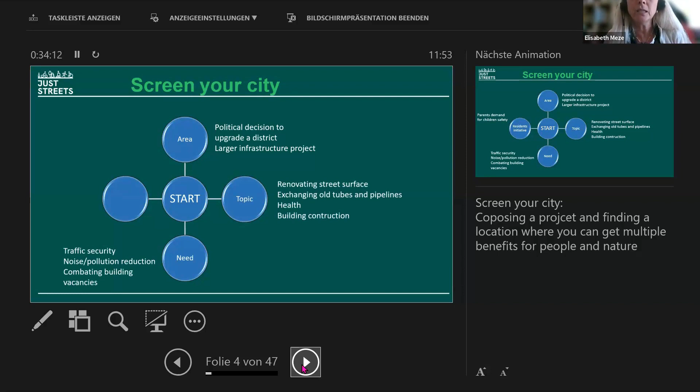So where to start? As a suggestion, try to screen your city. Where are areas where the politicians already decided to upgrade a district for a larger infrastructure project? Or are there topics like exchanging old tubes in the streets where you have to remove asphalt anyway, where to renovate a surface, where there are big building constructions, or where there is a need of more traffic security, reduction of noise and pollution, or reducing the amount of empty shops in a neighborhood, like combating building vacancies? Or are there initiatives in a city where residents want more children safety, more traffic security? Try to screen your city and find a place where many of these elements fit into.

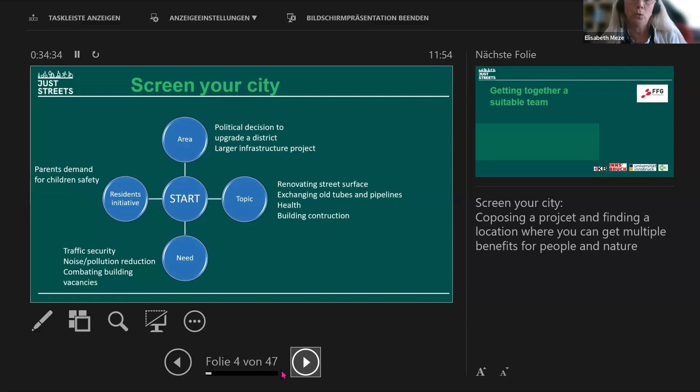As a second step, try to get together a suitable team, because you need to back and engage each other and strengthen each other to perform a big change in creating a climate fit public space. So where we started was a collaboration between the municipality's utility company dealing with water, sewage, garbage, etc., and with the university.

And in the city, as I was involved, I thought, who of the other departments can I involve to strengthen each other and maybe have some better collaboration where we can join different projects together? So I found team members in the Department for Green Space and the Department of Engineering.

And then at the same time where we started, Innsbruck finally got a climate map identifying areas which are hotspots, really hot spots during summer months because of dense building and a lot of asphalt saving heat in the surface. We sent out a PhD student to detect really hot spots which are useful, where we could start implementing blue infrastructure.

And at the end, we found something. It is not a park, it was actually a traffic island where 5 streets joined together. It was not the hottest place in the city, but with very much sealed surfaces, as it was adjacent to the municipal's fair or exhibition center. There were already street works in the pipeline, so they planned to make a meeting zone, and they were building at the back, here you can see it, a new train station. So we thought maybe that's a useful place where we could implement blue infrastructure for cooling the city.

This area had also traffic problems. They were planning 120 new flats for social housing, a very unattractive street place.

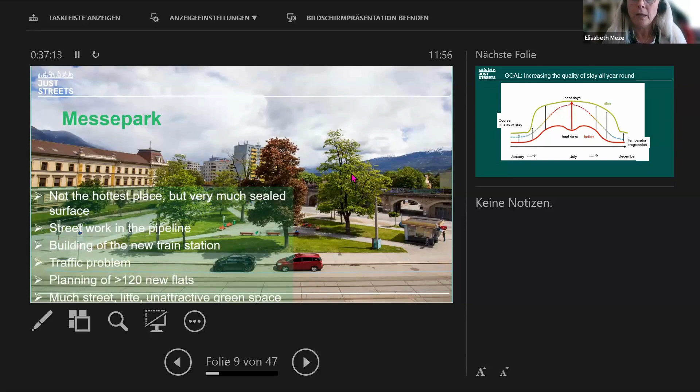So, how do you go ahead? When you look at the dotted line, you see a normal temperature curve throughout the year. In the park, the quality of stay, shown on the red line, means people don't use such a traffic island in the winter time. Maybe they sit down in the spring. In the summer, when it's too hot, they retreat into their homes again. And in the autumn, they come out, and in the winter, they don't enter the park again.

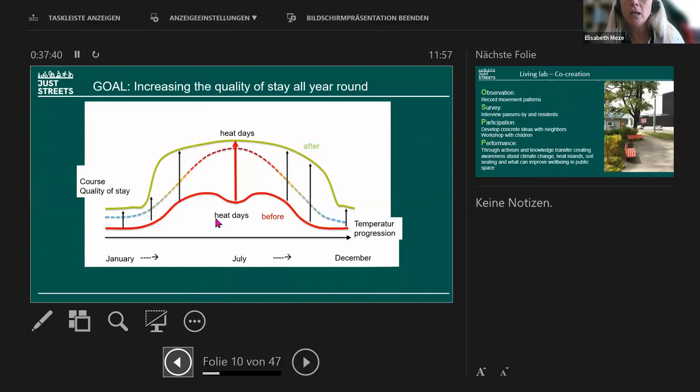What we wanted is to lift this area to a higher level with a higher quality use during all the year, meaning also in the winter it should offer quality of stay to residents. And in the summer, which is more important, during the hottest times of the day, people should use it as a place to get relief from overheated temperature.

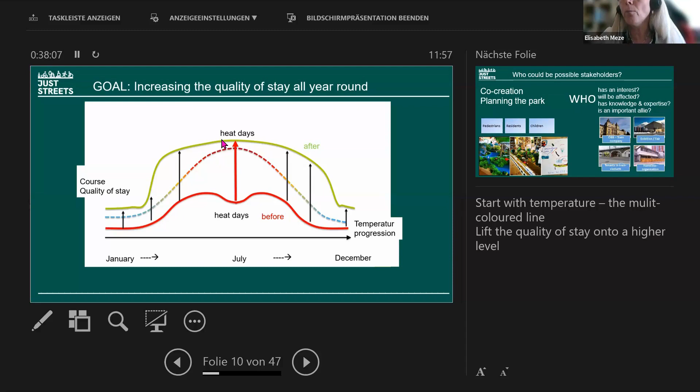All this should function as a co-creation process. So we had to find out who will be stakeholders, and in this way, always be as strategic as possible. Ask yourself, who has an interest in this intervention? Who will be affected? Like, for example, the visitors of the fair who cannot use the parking spaces anymore when they will be turned into grass of a park area.

Who are important allies? Who can support you? Be very creative, not only the surrounding neighbors, but who will support your idea of making a favorable outdoor space, not used for cars with a lot of asphalt, but with much green space.

And we asked also children to get involved in the planning process. We had one week of workshop with children, also during Corona, where they decided we want a lot of water to play and an infrastructure for fun.

We had resident survey, we had observations, we had a post box set up, an online survey during Corona, where people were asked what they want or what needs they have as a recreation space in the city center. I was sitting there day and night, observing, counting, making pictures, finding out that except some homeless and some drug addicted, no one was using this traffic island.

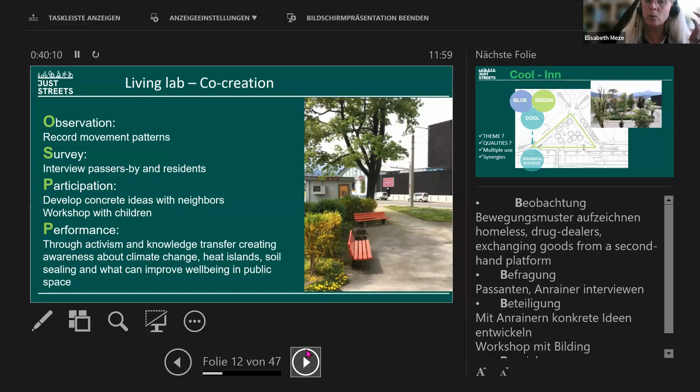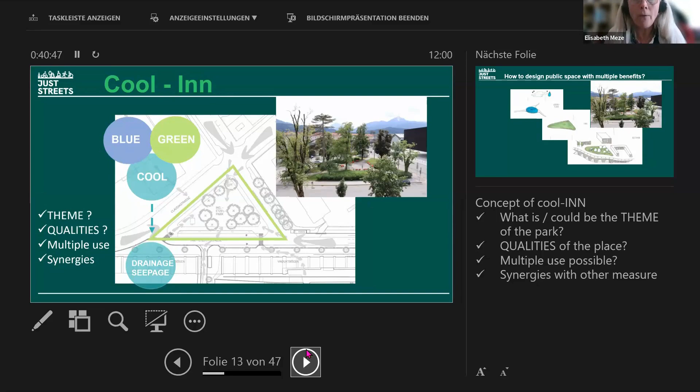Then our planner for parks and children facilities, she was designing the park, and we were asking, how can we combine blue and green infrastructure? The fact that we got some funding from the Austrian Climate Fund for cooling, and how can we reduce drainage water from going into the public sewage system, to keep it like in a sponge in the park and the surrounding when there will be extreme rainfall events.

So as a planner, you have to think about what qualities such a park should fulfill when we address multiple benefits: removing asphalt, increasing green infrastructure, and how can we get synergies in the usage of such a new park or green space in the city.

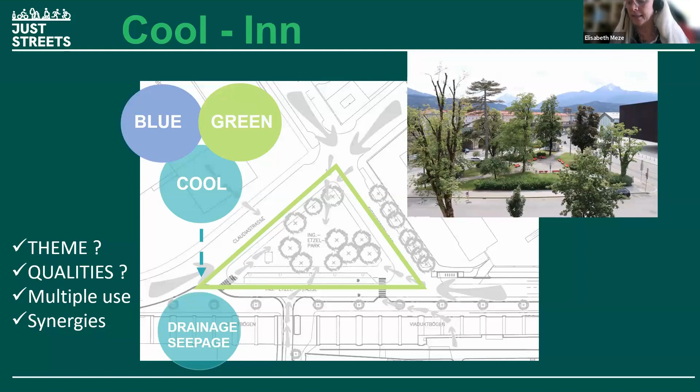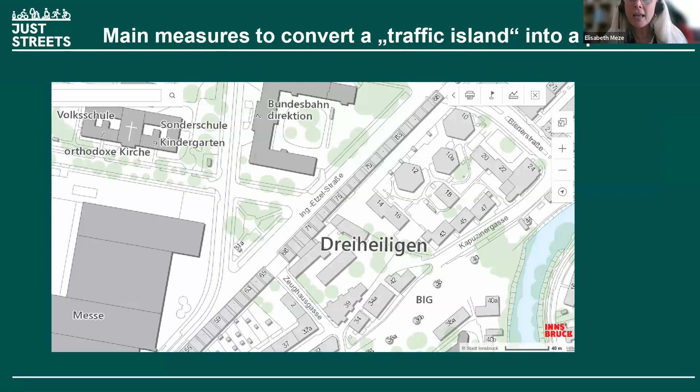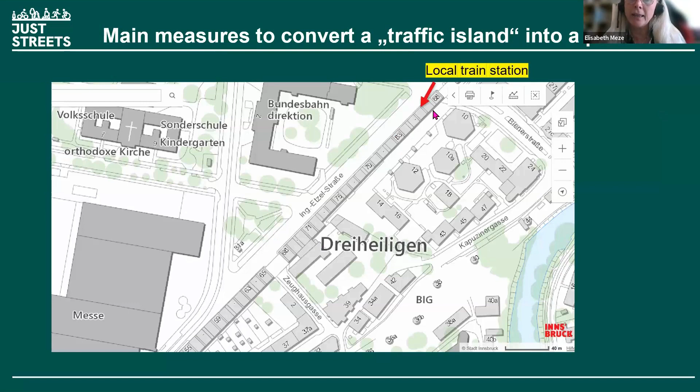So combining blue and green infrastructure means we also have to look at mobility in such a park, that we have to address residents and ongoing projects in the park, such as the building of the local train station. Here along the viaducts, you see the train station and the shops in the arcades of the train.

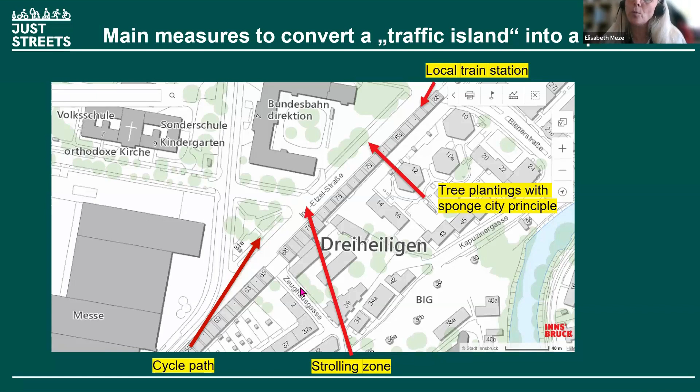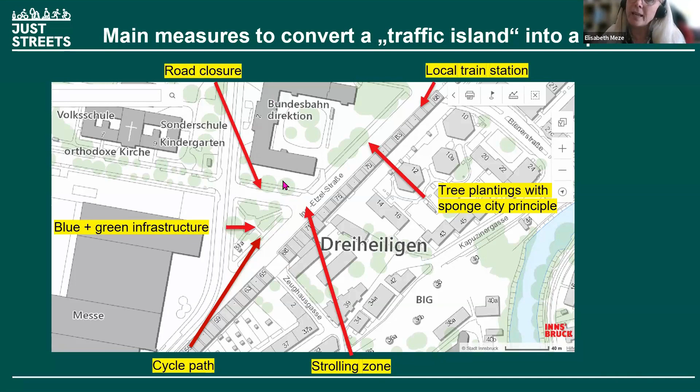We planned to plant trees following the sponge city principle, a strolling zone planned by the infrastructure department, and a cycle path, because people found out they have no permanent cycle path to the city center, along with blue and green infrastructure. And as there was one road which wasn't used during the building of the local train station, we decided to close it on a permanent basis.

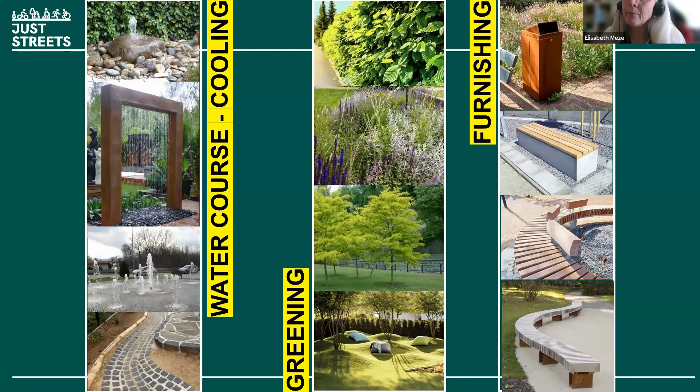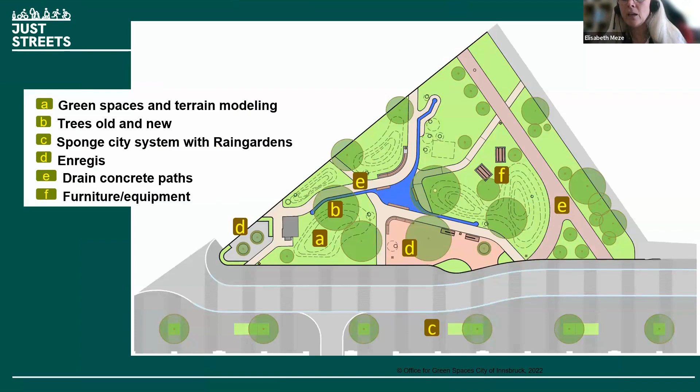Combining elements of water, greening, and furniture should give a new climate fit outer space for the residents and citizens of Innsbruck. This was the first climate fit park or climate fit outer space in western Austria. That's how it looks when we closed the street, got more green space, and got surface which has a drainage ability.

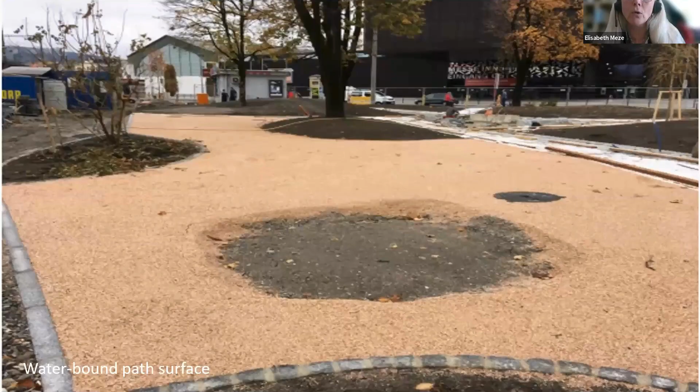What I want to show is creating green infrastructure or climate fit infrastructure in a city means you have to do a lot of building underground. Even though it looks very smooth and nice on the surface, there are a lot of technical features underground, like formwork for the drain concrete, for the water-bound surface, and here where we were planting the sponge city trees.

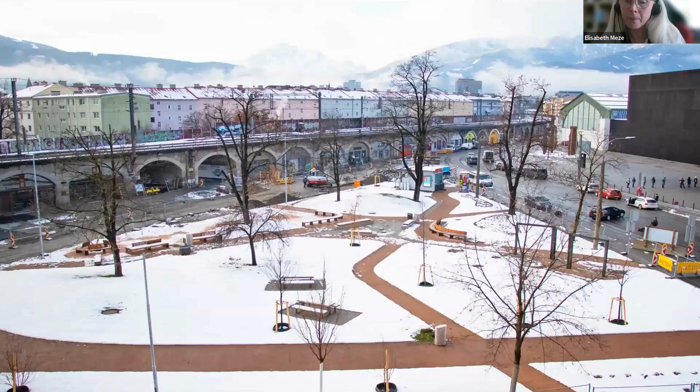What you can see is surfaces in the cities must be also usable in the winter. So this concrete and surface which is water permeable also enables people to use it in the winter without slipping on ice surfaces.

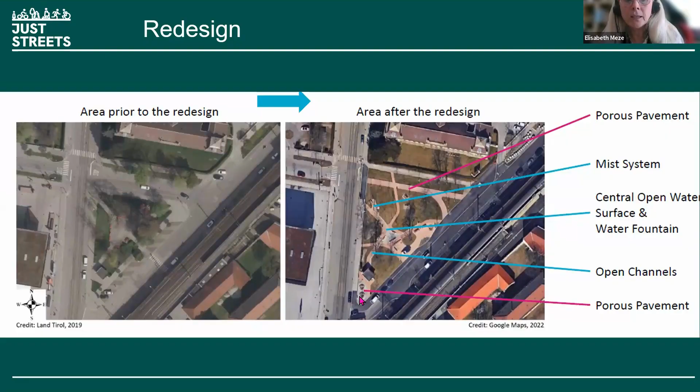And now it looks like this from the space, with a lot of green space and surfaces which can have water penetrating into the ground, feeding the trees in dry events. And a lot of water, as the children wanted to have space to play. And as you see, it is not a flat surface. We have modulated 4 hills in the park where people now rest under trees.

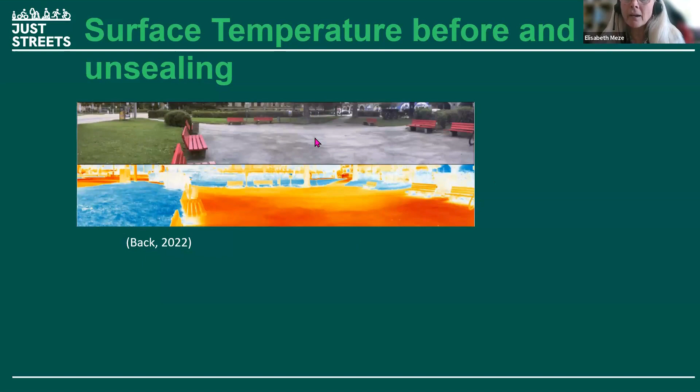As this was also accompanied by the university doing scientific research on heat, before it was implemented, we had a lot of heat on the concrete and asphalt surfaces through the park. Afterwards, where we created other types of surfaces like drain concrete, the temperature is very much reduced in the midst of the summertime.

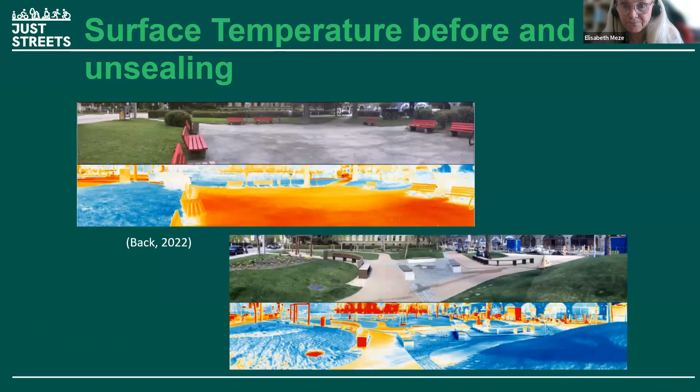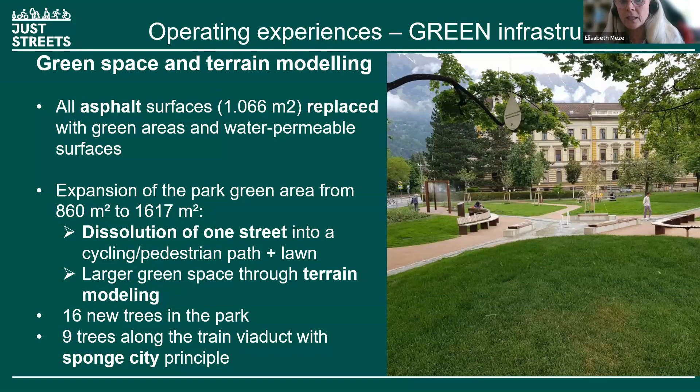We were able to remove all the asphalt of the area from the parking squares, from the street and the paths going through, increasing the size of the park by 100%, setting new trees and also trees with the sponge city principle. Here you see this, where we have enabled the trees to create more space underground for root penetration, where we filled up with compost and biochar produced in the city from the city's utility company.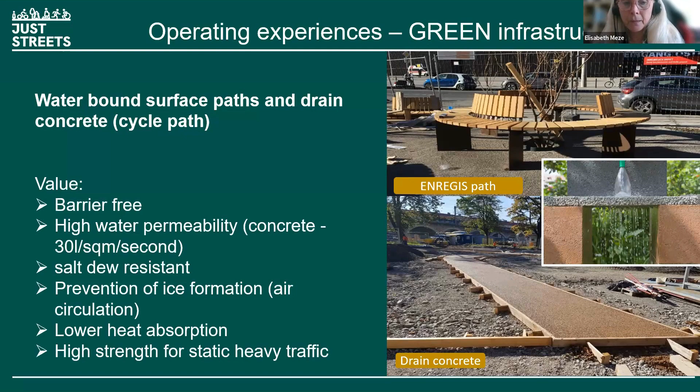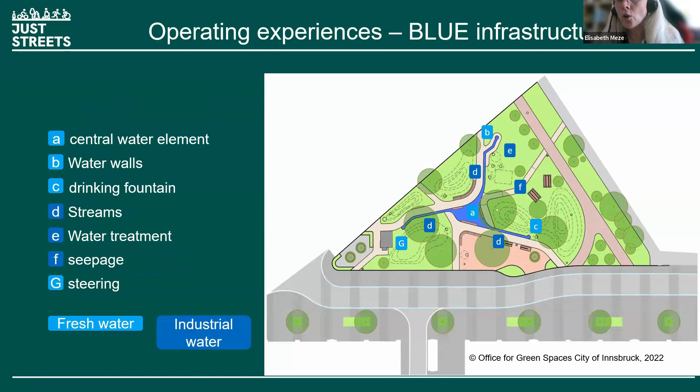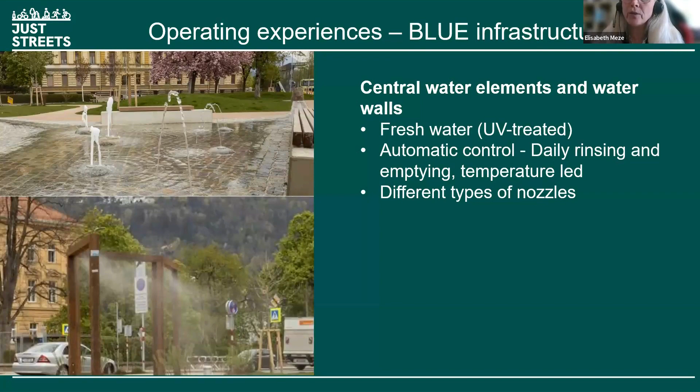Elements from water are used with fresh water and industrial water, meaning filtered water for feeding the trees. And here we have also different types of nozzles, all automatically controlled. What I wanted to show you is when there's a very nice surface water enabling children to play, there's actually a Rolls Royce, I would term it, underground. You have sand filters, UV filters, water collected from sludge traps, and all automatized depending on the temperature of the day and the humidity of the air.

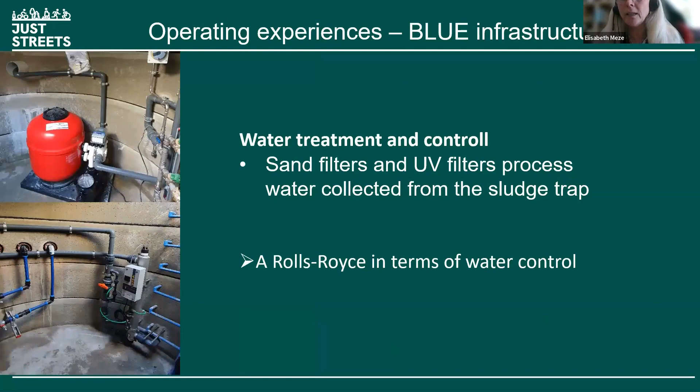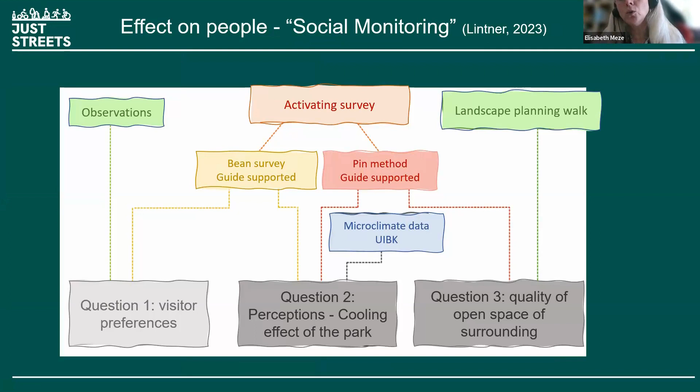So actually this costs a lot of money to retrofit a city so that it's used for many different purposes, installing green and blue infrastructure. We were asking afterwards in a survey how the benefits for the people actually are of this new green space and cooling space of the city.

People experience the park now as more pleasant in terms of temperature than the surrounding. And most people using the parks come from the immediate neighborhood, having no balconies or inner yards in their housing, so they consider the park now as their extra living room or their playing room for children.

Water is the most central element for them to enjoy the park. When we ask them what elements they prefer most, it's all the elements of water. Second, the hills and the green lawn. And third is infrastructure, meaning picnic tables or benches. But water seems to be the most attractive for all the people passing by and using the park.

When we talk about how we can communicate this issue to the bigger audience of the city, to the citizens, we want to inform them. We want to increase awareness about climate change and retrofitting public space, and we want to tell them there is a meeting space for small and medium-sized events. How can we deal with this issue?

Positive experiences are remembered longer. This all environmental psychologists confirm. And involving people in a campaign, in an information and communication campaign, means that when they are part of this process, maybe they become so conscious that they transfer sustainable messages into habits and into actions.

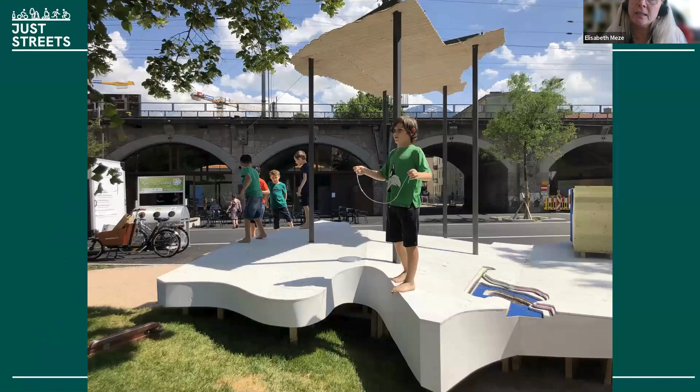We had different music events, theaters, climate theaters. We had repair workshops, food workshops, all dealing in the park with sustainability.

So we had both informing people that there is a new park on one side, and that this park has elements of climate and sustainability, where people can learn about the issue of sustainability on a daily basis. And we had also big events where people really were crowding, 20,000 people in the whole area, celebrating finally parties after Corona.

So what are the secrets of implementing unsealing cities, making cities more climate fit? This is already the conclusion: get together an interdisciplinary team of experts, finding strategic allies in the different departments and maybe also institutions and NGOs.

Include citizen participation and a co-creation process, because there you listen to the needs people have in getting more attractive public space. And do it in a top-down and bottom-up approach, meaning coordinated by the city and implementing also citizens' initiatives where there are needs for health, needs for traffic security, etc.